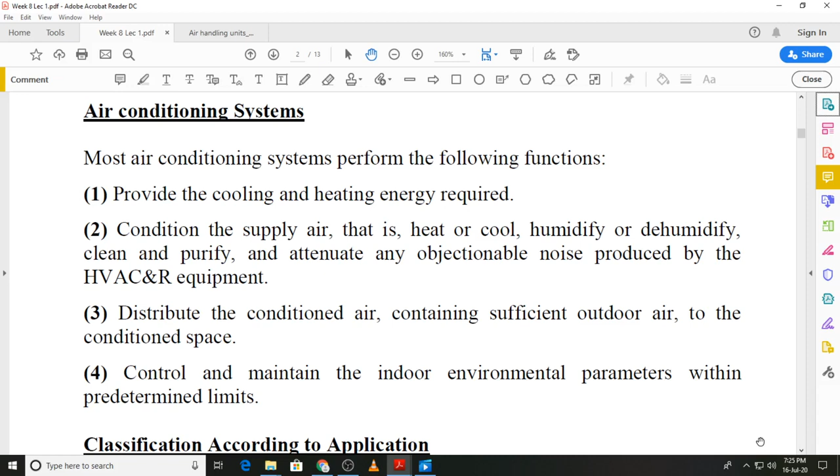The classification of an air conditioning system can be done on the basis of application, that is for human comfort, and that takes various forms. For example, if you are providing air conditioning to the occupants of an office building, a shopping center, or a restaurant, that's the commercial sector. You also provide the same air conditioning for educational institutes, libraries, etc., so you have the institutional sector.

After that we can also go to the residential sector, which includes hotels or apartment blocks that are air conditioned. Then we have hospitals, clinics, or other healthcare facilities. And finally, of course, the transport modes, which include air travel, travel on roads, and on sea. So we have a wide and diverse range of applications of air conditioning for human comfort.

Then we move on to the industrial application, that is process air conditioning, and there are several examples. I've just identified a few here. For example, in the textile industry, when we manufacture a particular textile or fabric, the fiber used for manufacturing has properties very much dependent on the humidity and temperature levels, and those are controlled using some sort of air conditioning system.

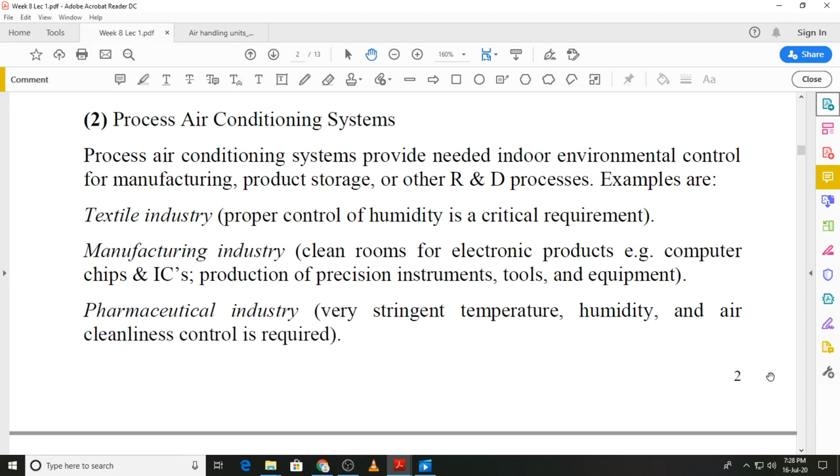We now move on to central air conditioning systems, and there are three broad categories, that is all air systems. When we talk about these three categories, we divide or distinguish between them according to the mode of energy transfer, that is how we are carrying energy from the conditioned space.

If it is done solely through the use of air within the conditioned space, that is known as an all air system. That all air system requires the use of air handling units or rooftop packages through which the air is conditioned. How these function, you will look at it later.

The difference between an air handling unit and a rooftop package is that primarily in a rooftop package the refrigeration system is also present over there, whereas in an air handling unit the refrigeration system is separate and it is located in the plant room of the system.

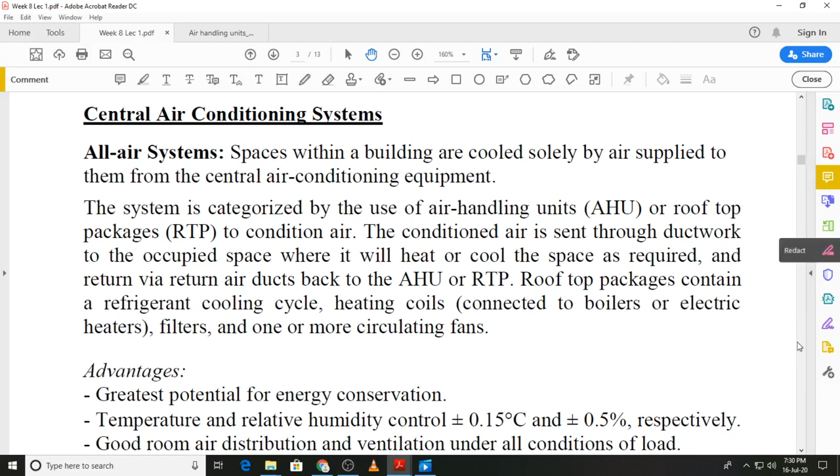Then we look at the various advantages and disadvantages of such a system, and for large buildings and complexes, this has the greatest potential for energy conservation, and we have very precise temperature and humidity control. Air distribution and ventilation under varying loads is carried out quite well with this, and the noise in the conditioned space is minimized because we have a plant which is located away from the conditioned spaces as required.

Of course, it has certain disadvantages, that they take up more space, and if you have to retrofit such a system, that means after several years you have to make changes that may not always be possible. And the balancing of air requires special attention in large buildings, but that is nowadays not much of a problem, because we do it through computerized control systems.

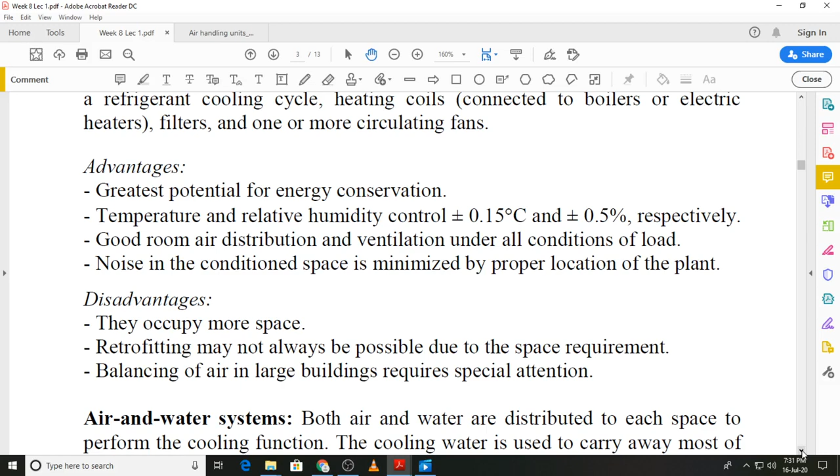Then we have the second type of air conditioning system, which is known as the air and water system, and this time we are using both air and water inside the conditioned space for the energy transfer. The water takes away the sensible energy.

If we are talking about cooling, it will be chilled water that is used in the conditioned space. If we want to provide heating, then it will be hot water, and the air will take up the role of ventilation, and it will also carry away the latent load, that is the moisture from the conditioned space.

And these are systems which work best for what is known as perimeter applications. That means in the exterior spaces of buildings with large sensible loads, and where the control of humidity is not required very closely.

The advantage, of course, is that you can control individual zones by varying both the air and water flow rates or temperatures. Space requirement is somewhat reduced, and the cooling coil is in the conditioned space, but it is dry, so the problem of a condensate that will have to be drained away is not present, and that also eliminates any risks of bacterial growth.

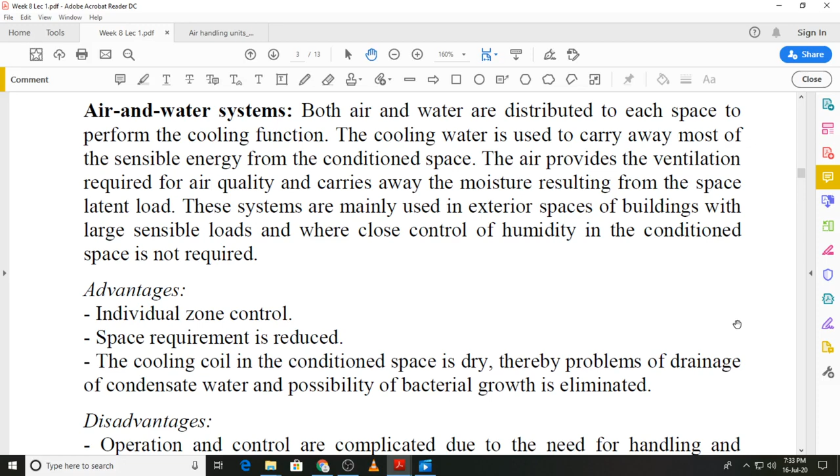The disadvantage is that operation control is quite difficult, in the sense that we need to control both the flow rate of water and air and their temperatures, and as mentioned earlier, the usage is suitable for perimeter zones where we have large sensible loads.

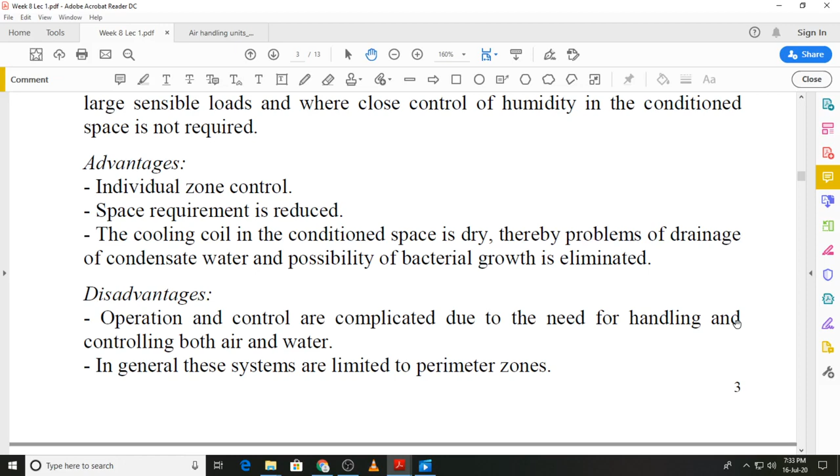Then we will move on to the third type, in which we will use only water for carrying the energy into or away from the conditioned space, and they again require units which are known as fan coil units, and they are located in each room of the building, and if cooling is required, chilled water will be circulated inside those FCUs.

And if it is heating that is required, you can circulate hot water through those coils, and that is how the all water system works. The air has no role in that sense, so if we require ventilation, the air will have to be supplied from outside through an opening in the wall.

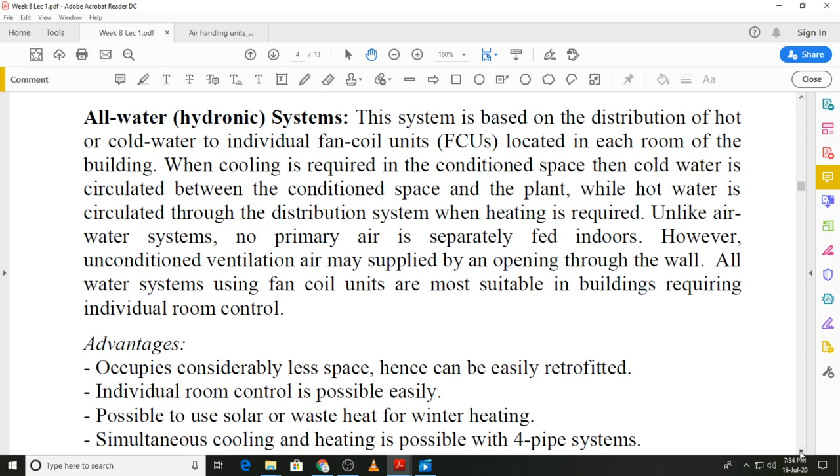And these would work where you will just require individual room control, and again they require less space and they can be easily retrofitted. Individual room control is possible, and because in winter the temperature of the water that is required is not too much, we can also make use of solar or waste heat for that purpose.

Simultaneous heating and cooling is possible with what is known as a 4-pipe system. That means there will be 2 coils, one which can carry hot water and the other which can carry cold water, whereas there is also another system which is known as a 2-pipe system, so at one time you can either provide chilled water or hot water.

The disadvantage is that maintenance costs are higher, and draining of the condensate can be an issue at times, which can lead to health risks, because bacterial growth can occur if the condensate water is not properly drained from the conditioned space. Ventilation can also be an issue since we are just relying on the outside air, especially in summer and humid climates, where it may not be suitable to use these sorts of systems.

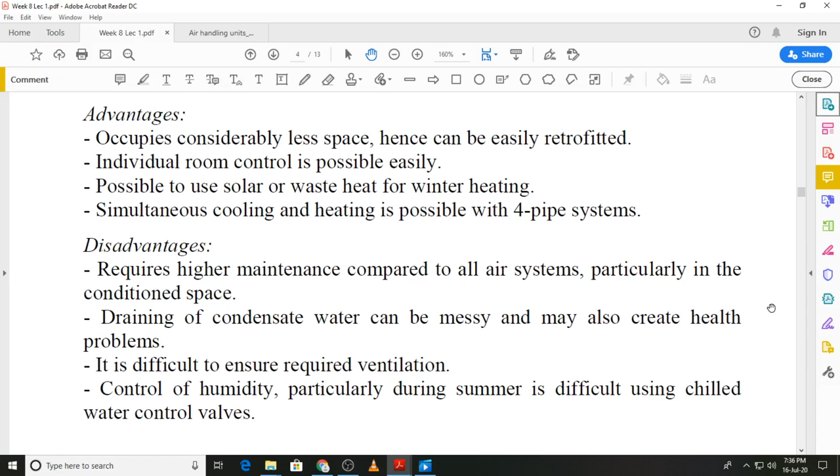The most widely used system is the all air system, and that is the type of system we are now going to look at in more detail - the all air central air conditioning system.

These are systems for large area buildings with many zones of conditioned space. A zone is not necessarily a single room - it can be a collection of several rooms that all have the same operating characteristics. Large area buildings can have several zones with their own operating characteristics, and for that we use a central air conditioning system of the all air type.

The all air system has subsystems, one of which is the air system. Remember, we are using air as the only medium used to condition the space.

The components of an air system include the air handling units, the ductwork for supplying and returning air from the conditioned space or spaces, and various terminals or VAV units. VAV stands for variable air volume - we will look at that later on.

When air is supplied to a room or space, we have to diffuse it so that the air movement in the conditioned space is done properly. We also need an exhaust system for maintaining desired indoor air quality - we exhaust part of the air returning from the conditioned space, then mix the recirculated air with fresh outside air.

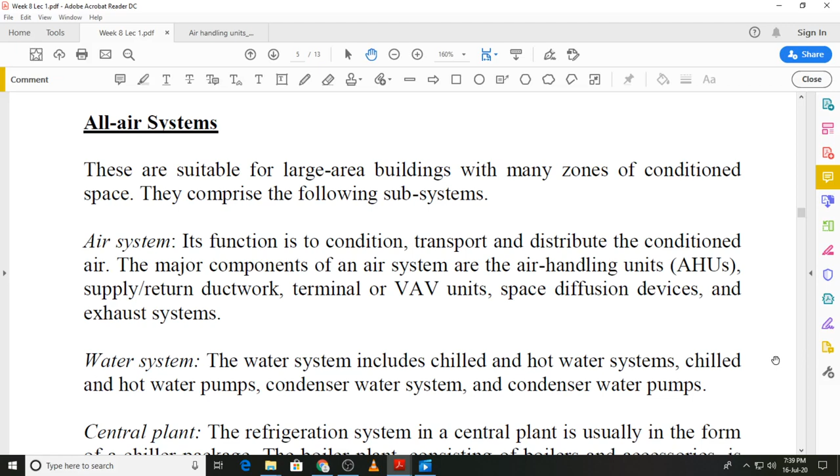As I said earlier, we have a central plant which is separately located, maybe in the basement of a building, or it could even be a separate facility away from the building. This is done to ensure that the noise of the equipment in the plant is not transmitted into the conditioned spaces.

We have access for personnel working in the plant for maintenance purposes, etc. The central plant will house the refrigeration plant, also known as a chiller package, which will ultimately provide you with chilled water. You will also have the boiler plant that provides hot water or maybe even steam for winter air conditioning.

We will have pumps for circulating the water, and also we might have a water cooled condenser for which there will also be a water circuit. Finally, since these are now large systems, they require control through a control system.

We have controls which are now microprocessor based, with various sensors for temperature, humidity measuring, and pressure gauges, all connected to a central control system. Outputs from these gauges and sensors allow the operation of various components of the system.

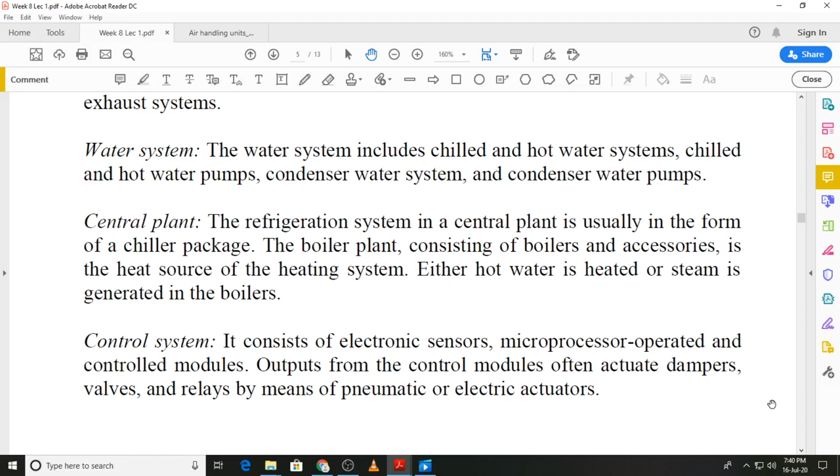What we can do is look at what is happening in the plant room, and then we will move on to the air handling unit.

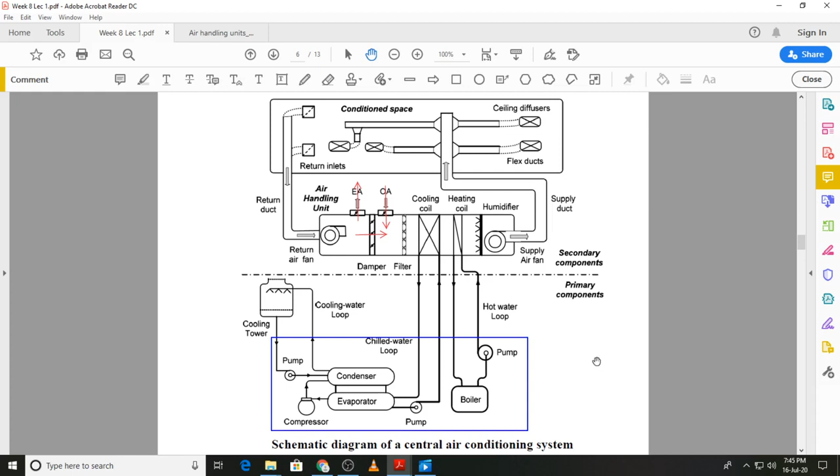We will now look at another view of the AHU, and you can see all those panels. It's like a large cabinet with access panels that allow you to service various parts of the AHU. So you have dampers, you will have blowers, you will have filters, and the heating cooling coils.

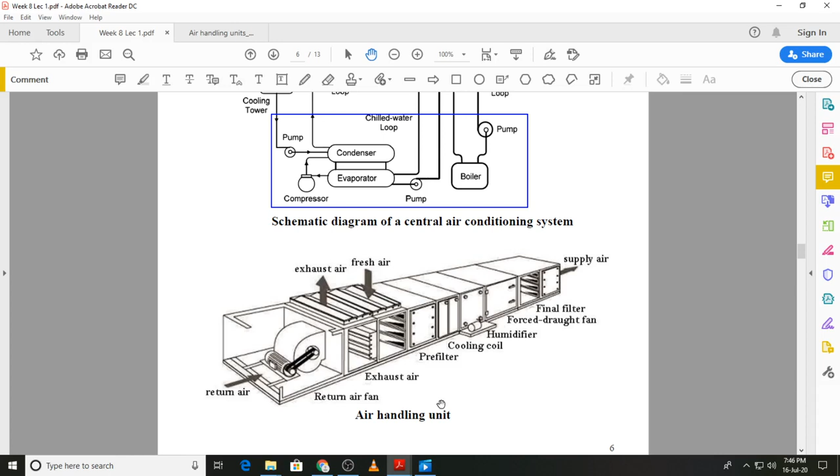So that is how an air handling unit would look like, and I will show you an actual photograph of an air handling unit, and then we will also look at a video showing the use of AHUs in a central air conditioning system. So I will just show you a photograph of an AHU.

There is going to be a set of filters over here. So if any dust particles from the conditioned space have gone into the air, they will be removed.

We will have a fan for the return air fan, and you will have the heating and cooling coils over here. So let's first look at the return air, then we will come to those coils when we talk about the supply side. The return air goes into what is known as the mixing box.

Here the recirculated air mixes with the fresh air from outside. As you can see, we are moving in this direction, and we have an exhaust damper over here. Part of the air which is returned from the conditioned space is exhausted, and the remaining air is over here, mixed with the fresh air.

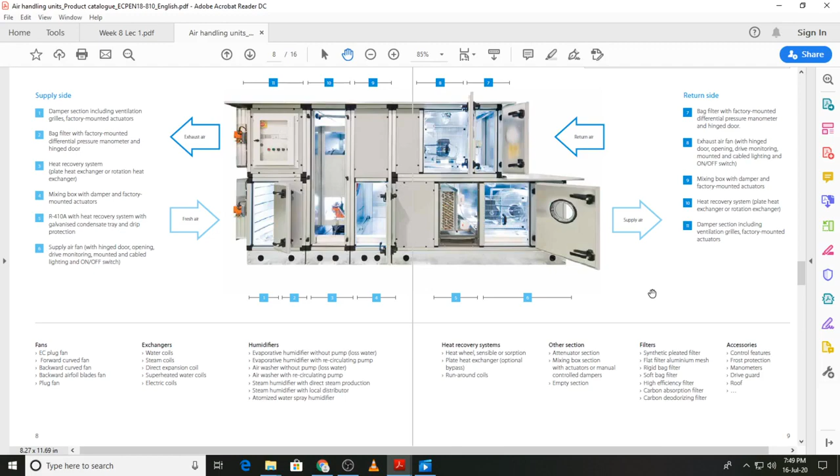We will now look at a video on the working of an air handling unit.

So where do we find air handling units? Air handling units, which usually have the acronym AHU, are found in medium to large commercial and industrial buildings. They are usually located in the basement, on the roof, or on the floors of a building, and many large buildings will likely have a mixture of all of these.

AHUs will serve a specified area or zone within a building, such as the east side or office areas from floors 1 to 10, or perhaps a single purpose such as just the building's toilets. Therefore, it's very common to find multiple AHUs around a building.

Some buildings, particularly old high-rise buildings, will have just one large AHU, usually located on the roof. These will supply the entire building. They might not have a return duct. Some older designs rely on the air simply leaking out of the building, but this design is not so common anymore in new buildings because it's very inefficient.

Now it's most common to have multiple smaller AHUs supplying different zones to give better control and higher quality space conditioning. Buildings are now also much more airtight, so we need to have a return duct to regulate the pressure inside the building. So what is the purpose of an air handling unit?

Air handling units condition and distribute air within a building. They take fresh ambient air from outside, clean it, heat it or cool it, maybe humidify or dehumidify it, and then force it through ductwork around to the designated areas within the building.

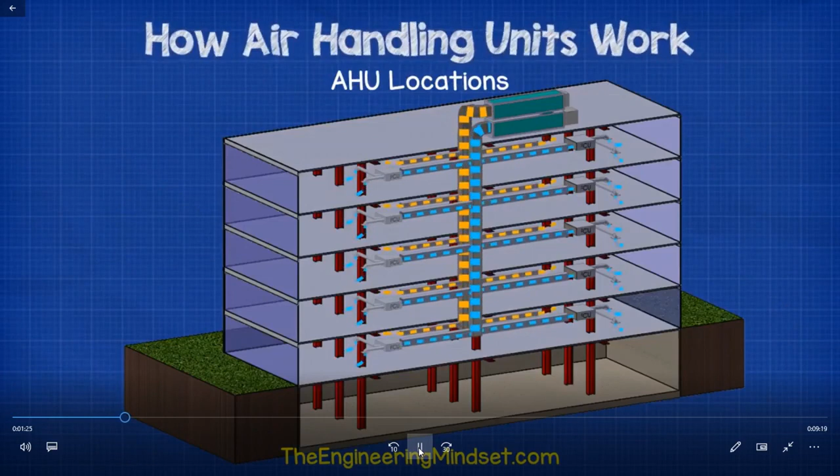Most units will have an additional duct run to pull this dirty used air out from the rooms back to the AHU, where a fan will discharge this back into the atmosphere. Some of this return air might be recirculated back into the fresh air supply to save energy.

We'll have a look at that later in this video. Otherwise, where that isn't possible, thermal energy can be extracted and fed into the fresh air supply intake to also save energy. Again, we'll look at that in much more detail later in this video.

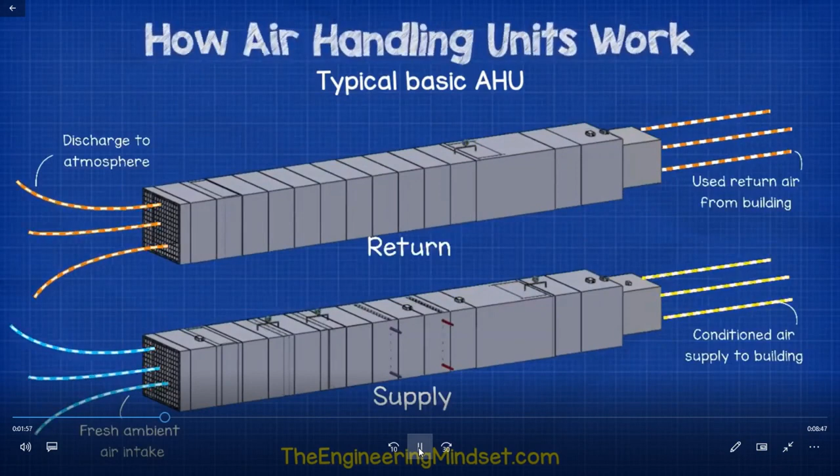Let's have a look at a simple, typical AHU design, and then we'll look at some more advanced ones. In this very basic model, we have two AHU housings for flow and return air. At the very front, on the inlet and outlet of each housing, we have a grille to prevent objects and wildlife from entering into the mechanical components inside the AHU.

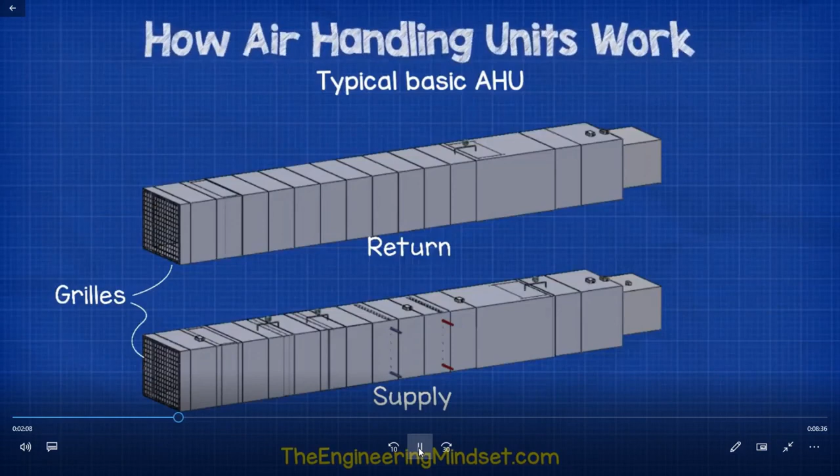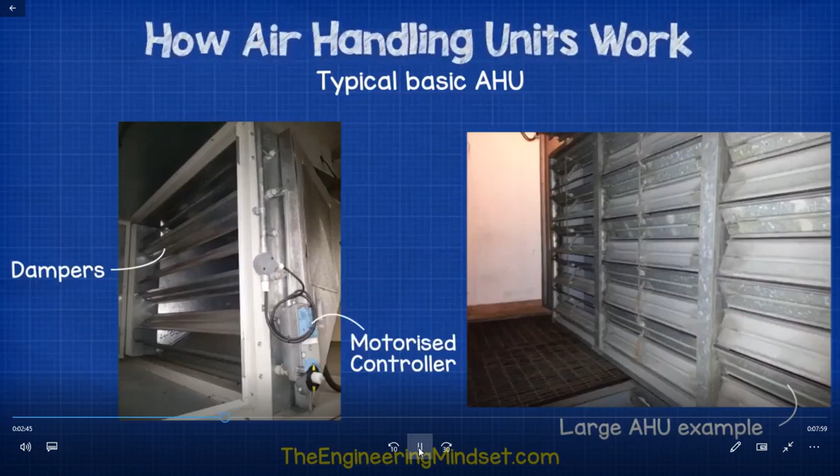At the inlet of the fresh air housing and the discharge of the return air housing, we have some dampers. The dampers are multiple sheets of metal which can rotate. They can close to prevent air from entering or exiting the AHU, open fully to fully allow air in or out, and also vary their position somewhere in between to restrict the amount of air which can enter or exit. I'll also show you some examples of real-world dampers in AHUs. The one on the left has the motorized controller visible, which changes the position of the dampers.

After the dampers, we'll have some filters. These are there to try and catch all the dirt and the dust, etc. from entering the AHU and also the building. If we don't have these filters, the dust is going to build up inside the ductwork and within the mechanical equipment. It's also going to enter the building and be breathed in by the occupants, as well as make the building dirty. So we want to remove as much of this as possible.

Across each of the filter banks we'll have a pressure sensor. This will measure how dirty the filters are and warn the engineers when it's time to replace them. As the filters pick up dirt, the amount of air that can flow through them is restricted, and this causes a pressure drop. Typically, we'll have some panel filters or pre-filters to catch the largest dust particles, then some bag filters to catch the smaller dust particles.

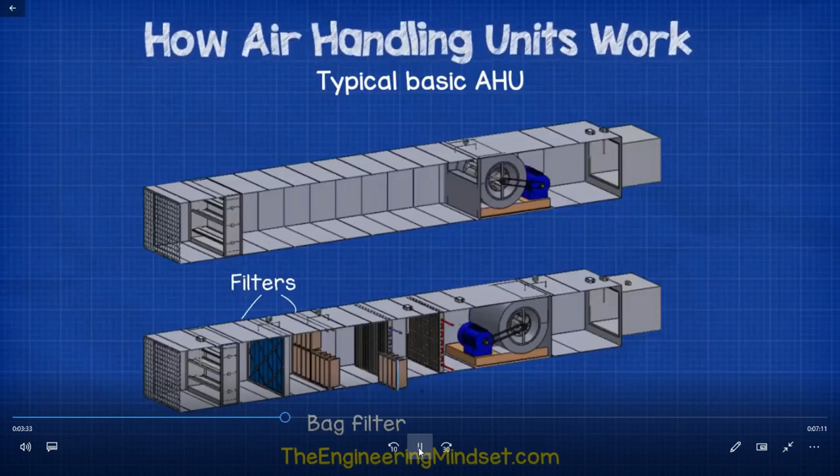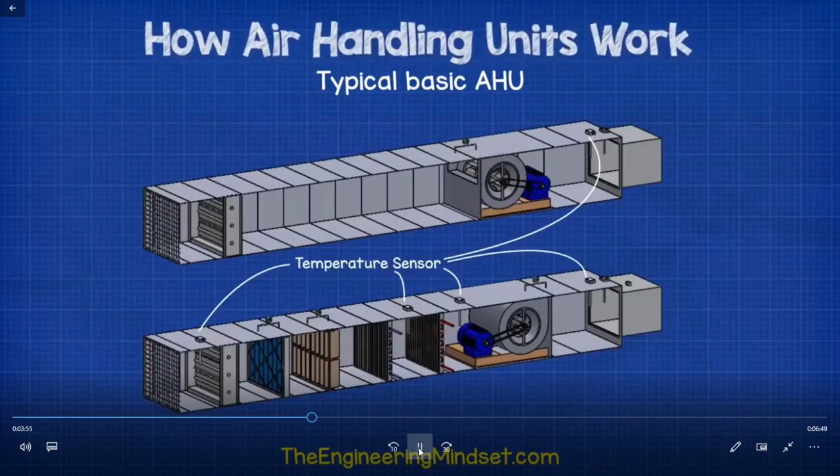The next thing we'll find are the cooling and heating coils. These are there to cool or heat the air. The air temperature of the supply air is measured as it leaves the AHU. This needs to be at a design temperature to keep the people inside the building comfortable. This design temperature is called the set point. If the air temperature is below this value, the heating coil will add heat to increase the air temperature and bring it up to set point. If the air is too hot, then the cooling coil will remove heat to lower the air temperature and also reach the set point. The coils are heat exchangers.

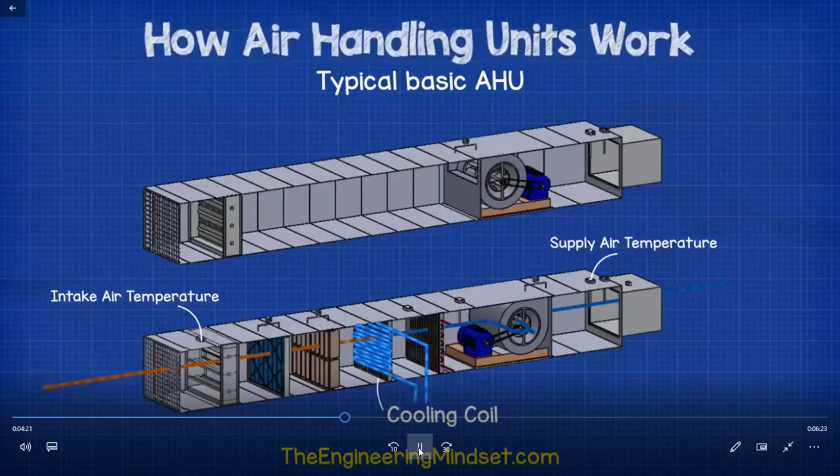Inside the coil is a hot or cold fluid, usually something like heated or chilled water, refrigerant, or perhaps steam. Now, we've discussed these in great detail previously in other videos.

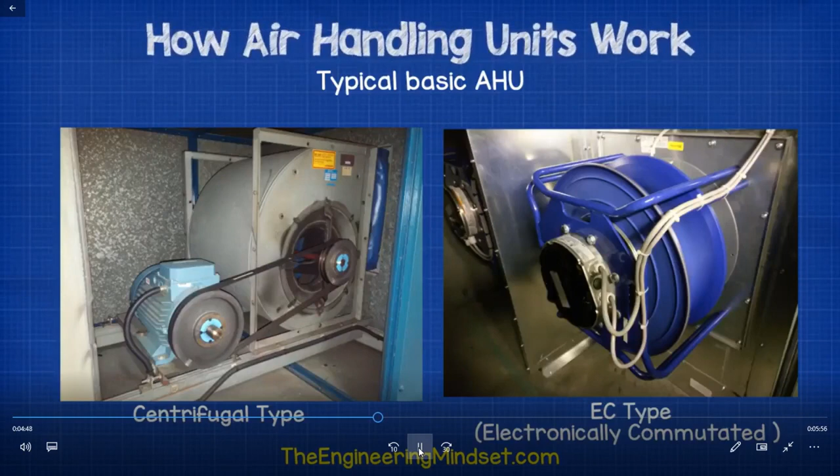Next, we'll have a fan. This is going to pull air in from outside and then through the dampers, the filters, the coils, and then push this out through the ductwork and around the building. Centrifugal fans are very common in old and existing AHUs, but EC fans are now being installed and also retrofitted for increased energy efficiency.

Across the fan we'll also have a pressure sensor. This will sense if the fan is running. If it is running, then it will create a pressure difference. We can use this to detect a failure in the equipment and warn the engineers of a problem. We'll also likely have a duct pressure sensor shortly after the fan. This will read the static pressure, and in some AHUs the speed of the fan is controlled as a result of the pressure in the duct.

So we'll also very often find a variable speed drive connected to the fan for variable volume systems.

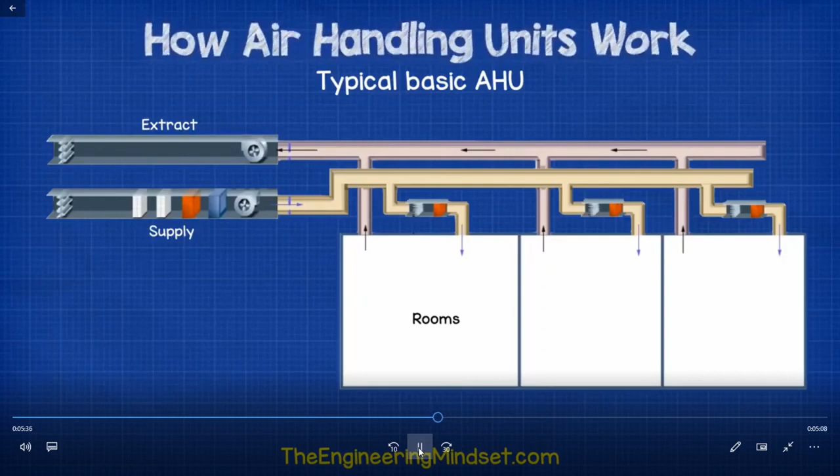Then we have the ductwork, which sends the air around the building to the designated areas. We'll also have some ductwork coming back, which is bringing all the used air from the building back to a separate part of the AHU. This return AHU is usually located near the supply, but it doesn't have to be, it can be located elsewhere in the building. The return AHU in its simplest form has just a fan and a damper inside.

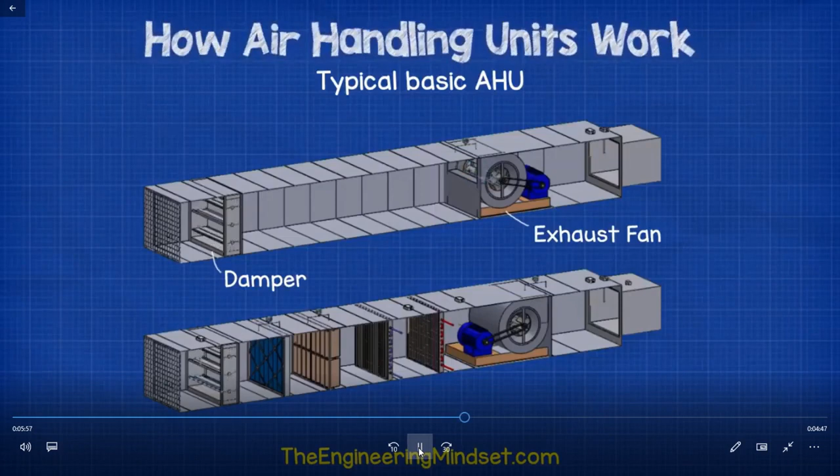The fan is pulling air in from around the building and then pushing it all the way out of the building into the atmosphere. The damper is located at the exit of the AHU housing and will close when the AHU turns off. That's a very simple and typical AHU, so what else might we find?

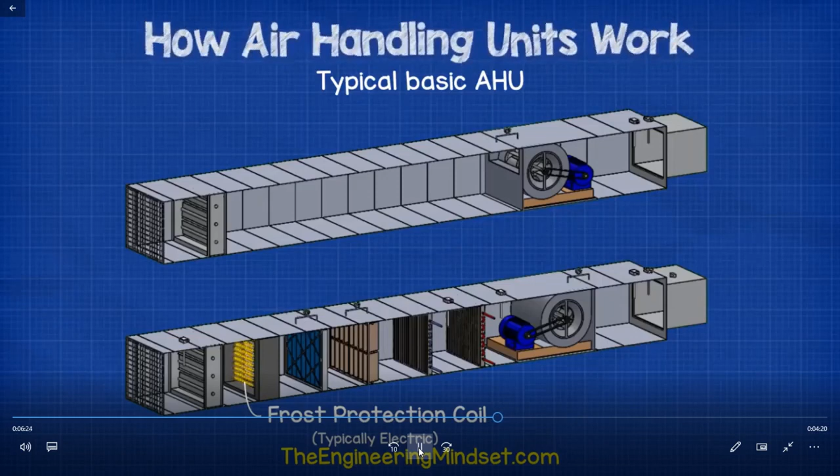If you're in a cold part of the world where air temperatures reach freezing point or close to it, we'll find a preheater in the inlet of the fresh air intake. This is usually an electrical heater. When the outside air gets to around 6 degrees Celsius or 42.8 degrees Fahrenheit, the heater will turn on and heat up the air to protect the components inside from frost. Otherwise, this could freeze the heating and cooling coils inside and burst them.

What about humidity control? Some buildings need to control the humidity of the air they supply into the building. We'll find a humidity sensor at the outlet of the supply AHU to measure the moisture in the air supply. This will also have a set point for how much moisture should be in the air by design. If the air's moisture content is below this value, then we need to introduce moisture into the air using a humidifier. This is usually one of the last things in the AHU. This device will usually either add steam or spray a water mist into the air.

Many standard office type buildings in Northern Europe and Northern America have turned off their humidity units or uninstalled them to save energy, although they are still crucial for places like document stores and computer rooms.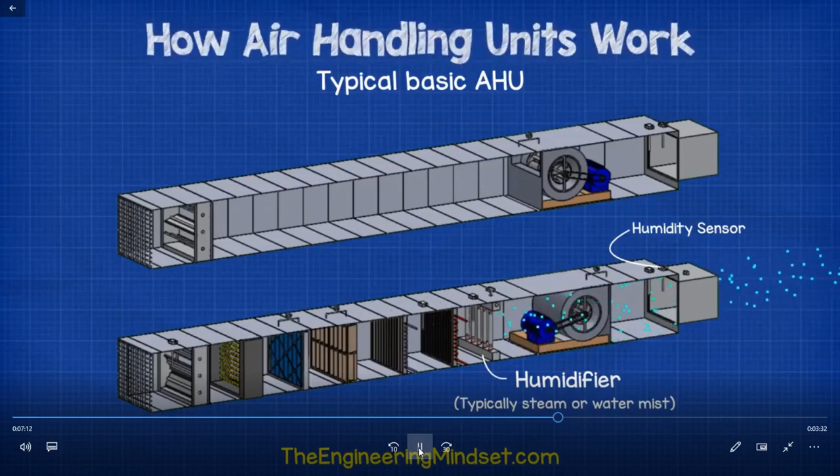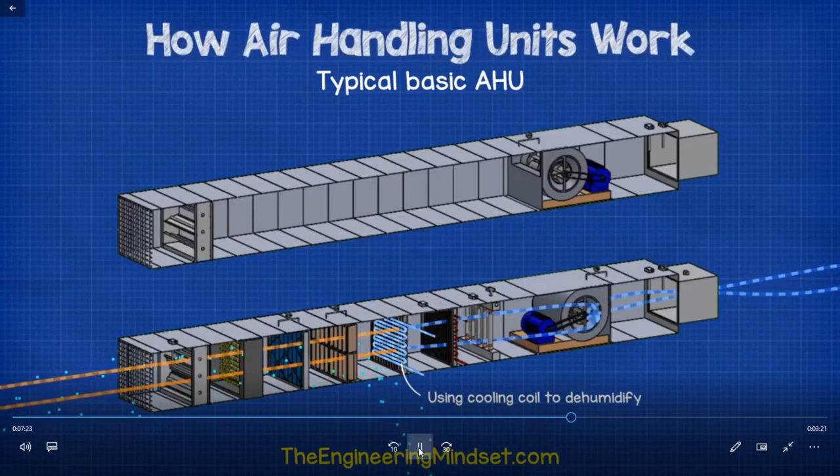If the air is too humid, then this can be reduced through the cooling coil. As the air hits the cooling coil, the cold surface will cause the moisture within the air to condense and flow away. You'll find a drain pan under the cooling coil to catch the water and drain this away. The cooling coil can be used to further reduce the moisture content by removing more heat, but of course this will decrease the air temperature below the supply set point. If this occurs, then the heating coil can be turned on to bring the temperature back up. This will work, although it is very energy intensive.

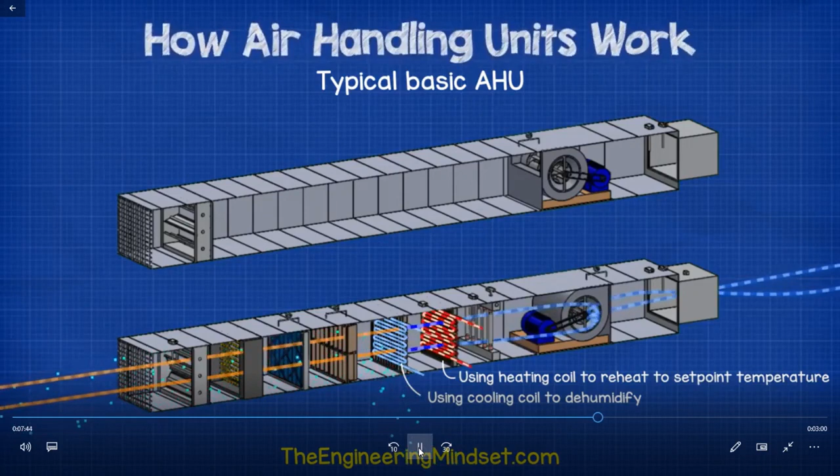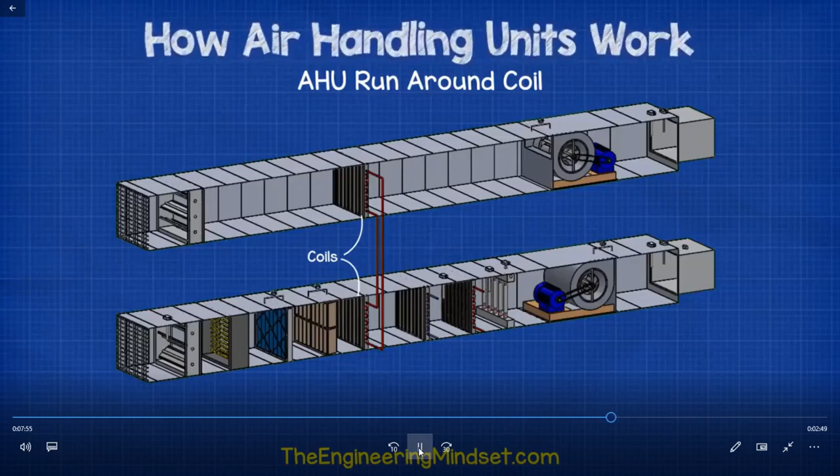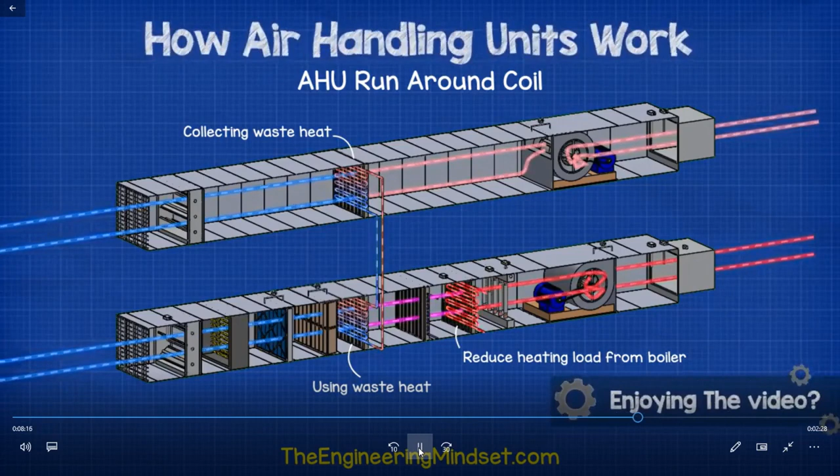Energy recovery. If the supply and extract AHUs are located in different areas, then a common way to recover some of the thermal energy is to use a runaround coil. This uses a coil in both AHUs and a pump circulates water between the two. This will pick up waste heat from the extract AHU and add this to the supply AHU. This will reduce the heating demand on the heating coil when the outside air temperature is below the supply set point temperature and the return air temperature is higher than the set point. The heat would otherwise be wasted as it is simply rejected to atmosphere. As the pump will consume electricity, it is only cost effective to turn on if the energy saved is more than the pump will consume.

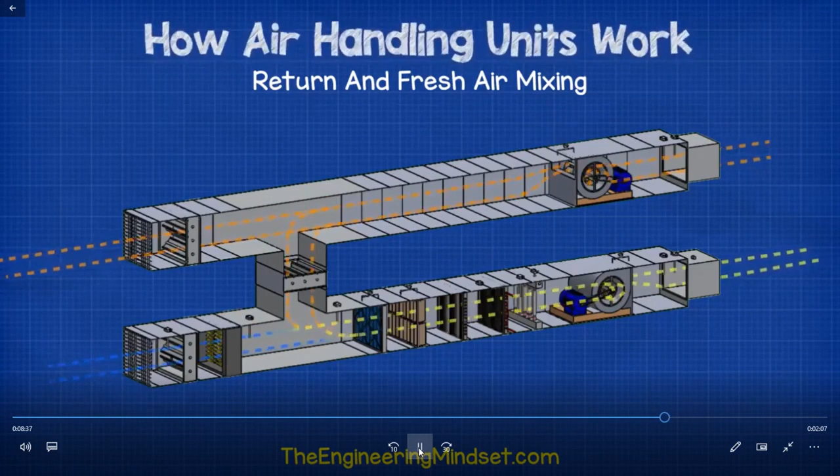Another very common version we'll come across is to have a duct sit between the exhaust and the fresh air intake. This allows some of the exhaust air to be recirculated back into the fresh air intake to offset the heating and cooling demand. An additional damper sits within the connecting duct to control how much air can be recirculated. This is safe and healthy to do, but you will need to ensure that the exhaust air has a low CO2 count, so we need some CO2 sensors to monitor that. If the CO2 level is too high, then the air can't be reused. The mixing damper will close and all the return air will be rejected from the building. When in recirculation mode, the main inlet and outlet dampers will not fully close in this setup because we will still need a minimum amount of fresh air to enter the building.

We can use this in the winter if the return air is warmer than the outside air, and we can also use this in the summer if the return air is cooler than the outside air, respective to the supply set point temperature. We'll also need some temperature sensors at the intake, return, and just after the mixing region. Some buildings require 100% fresh air, so this strategy can't be used everywhere. The local laws and regulations will dictate this.

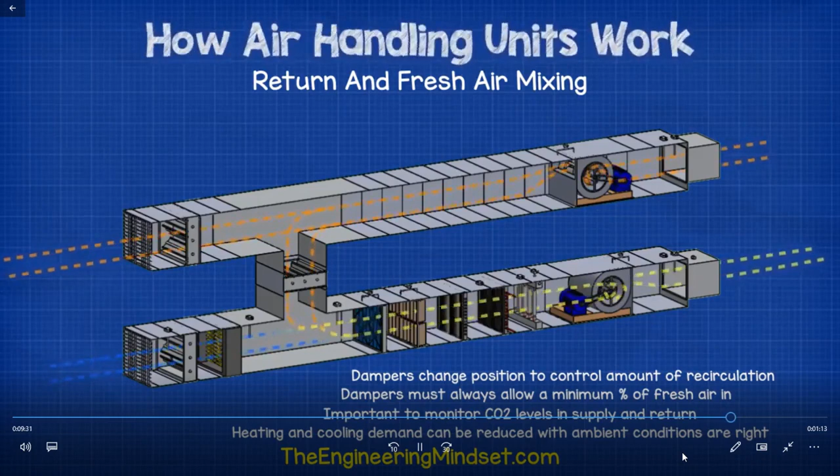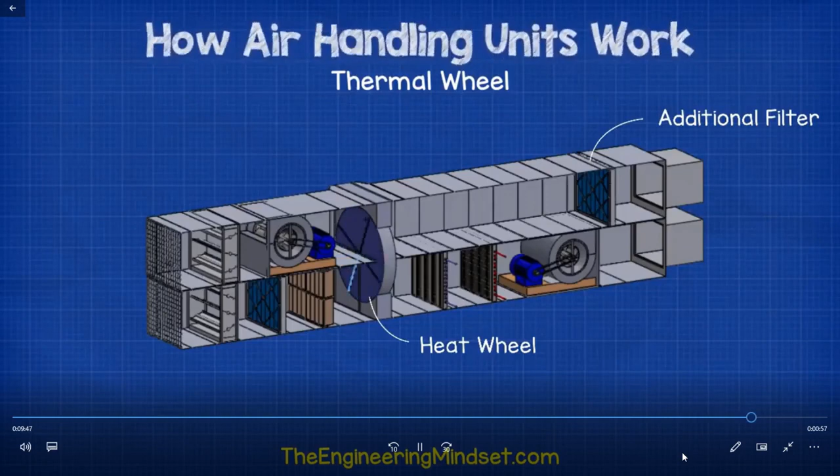Another variation we might come across is the heat wheel. This is very common in newer compact AHUs. This uses a large rotating wheel. Half of it sits within the exhaust airstream and half of it sits within the fresh air intake. The wheel will rotate, driven by a small induction motor. As it rotates, it picks up unwanted heat from the exhaust stream and absorbs this into the wheel's material. The wheel then rotates into the fresh air intake stream.

This air is at a lower temperature than the exhaust stream, so heat will transfer from the wheel into the fresh air stream, which heats the incoming air and reduces the demand on the heating coil. This is very effective, but some air will leak from the exhaust into the fresh air stream, so it cannot be used in all buildings.

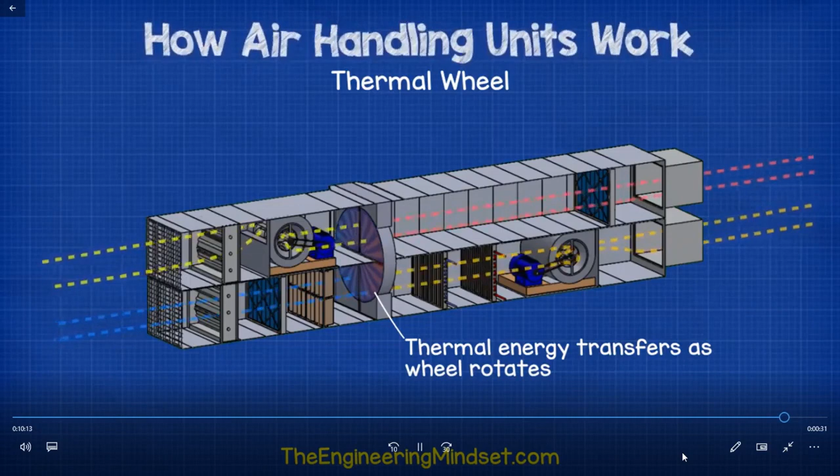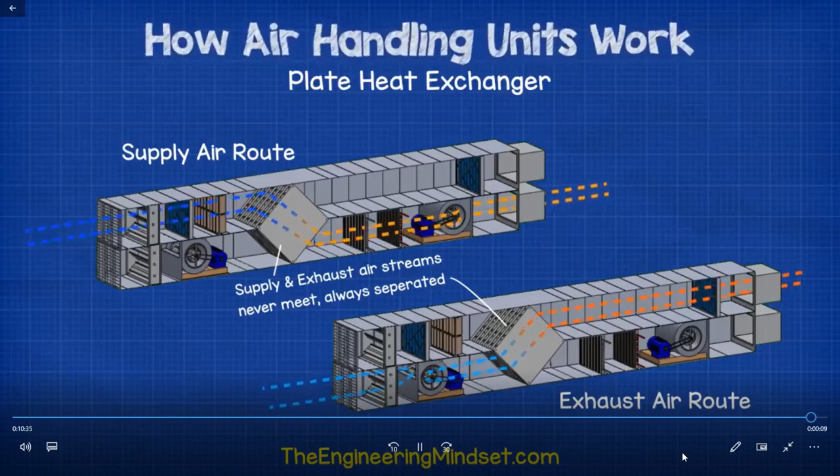Another version we might come across is the air plate heat exchanger. This uses thin sheets of metal to separate the two streams of air so they do not come into direct contact or mix at all. The temperature difference between the two air streams causes heat to transfer from the hot exhaust stream through the metal walls of the heat exchanger into the cold intake stream. The two air streams need to cross over for this to occur, so it can be a little confusing to look at. Just remember the air streams are not mixed.

We come back to the all-air central air conditioning system, and then we will look at further variations of this type of system: the constant air volume, or constant volume, system, or the variable air volume system. The constant volume system means that the volume of conditioned air supplied to a conditioned space remains unchanged even if the load in the space changes. That means the variation in load will be countered by changing the temperature of the air, keeping the volume supplied to the conditioned space unchanged.

So the simplest of these is the single duct, constant volume, single zone system. It has one supply duct through which hot or cold air will flow according to our requirement. In winter we will be using the heating coil to provide hot air to the conditioned space. In summer we will be supplying cold air to the conditioned space.

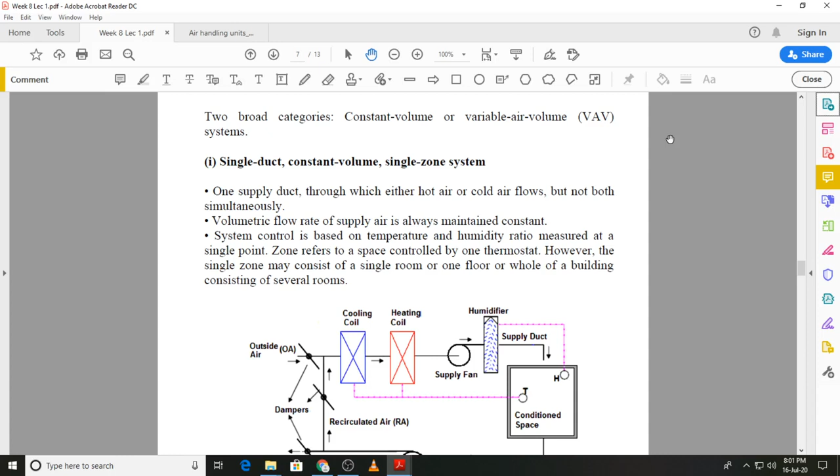The schematic diagram is shown here. You can see we have the cooling coil, the heating coil, and you might also have a humidifier shown in this schematic diagram. There is the supply duct and the return duct. Part of the return air is exhausted, the recirculated air is mixed with outside air, then it is passed through the cooling or heating coil as required. The cooling cycle on the psychrometric chart that we looked at earlier will apply to this particular arrangement.

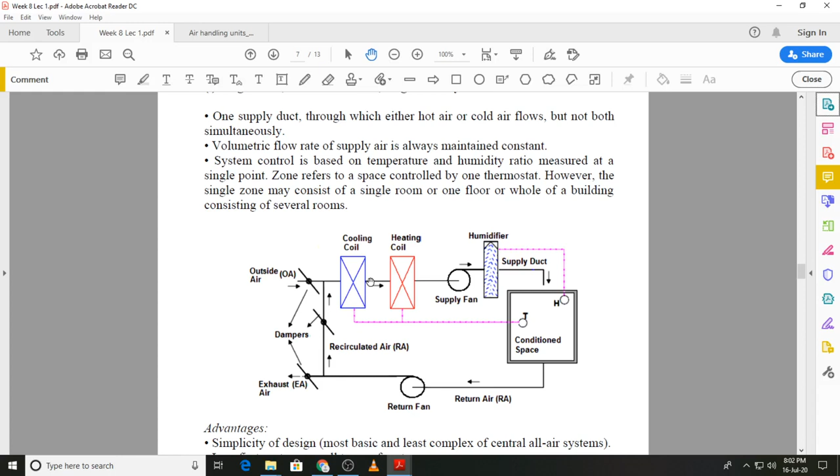It has certain advantages and disadvantages listed here, because it's the simplest of the designs. It has a low first cost and maintenance is easy, but the restriction is that it can condition only one zone. It is not suitable for multiple zones, and if there is a change in requirement from a single zone to a multiple zone system, this type of system, if installed, would not be easily modified. It would probably be better to shift to a proper multi-zone system, which we are going to look at as we move through this discussion.

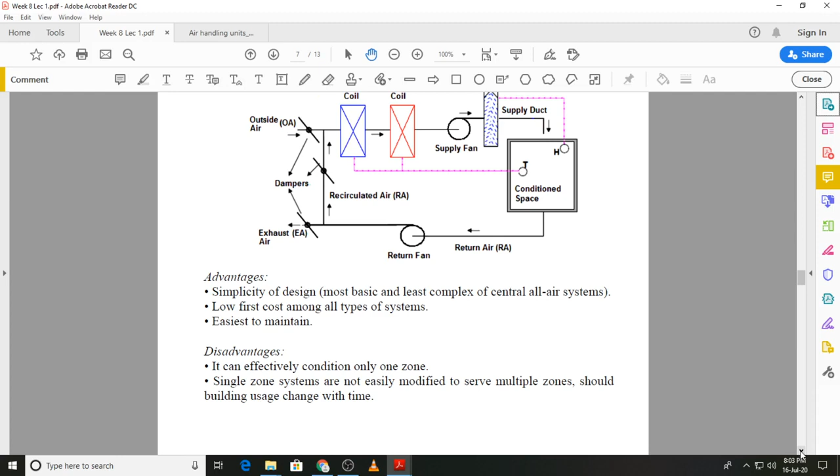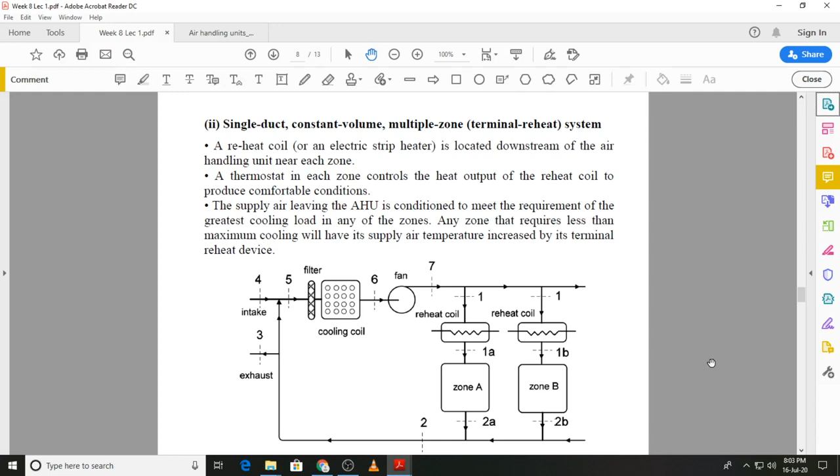Now let's look at the possibility where we still have a single duct and constant volume system, but this time it serves multiple zones. For simplicity, in the schematic diagram I have shown two zones. There can be more than two zones, and this type of arrangement is known as a terminal reheat system, in which we can see that before each zone there is what is known as a reheat coil. The purpose of the reheat coil is to provide energy to the air coming from the cooling coil according to the zone requirement.

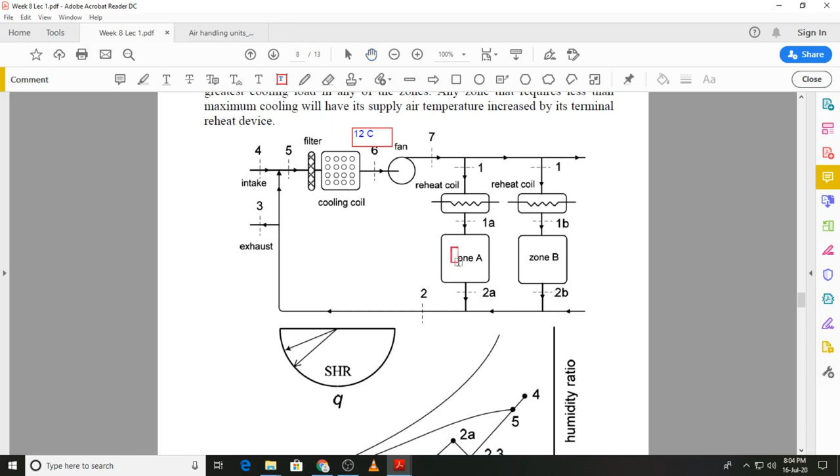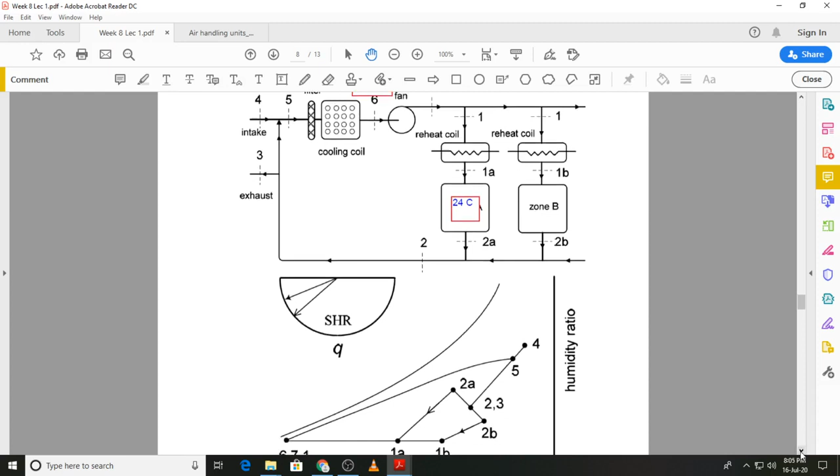Now let's say at state 6, after the cooling coil, we have air coming in at 12 degrees C, and we need to supply air to zone A, which we are keeping at 24 degrees C, whereas zone B is going to be maintained at a higher temperature, let's say 26 degrees C. You'll see the reason why I'm saying that. So the air we are supplying to zone A, let's say we need to supply it at a temperature of 18 degrees C — I'll mention that here — and the supply temperature to zone B, let's say that is higher, 20 degrees C.

So the supply of air at state 1A is at 18 degrees C, and the space is going to be maintained at 24 degrees C. The supply of air at state 1B to zone B is at 20 degrees C, and zone B is maintained at 26 degrees C. What we have done is cooled the air to 12 degrees C.

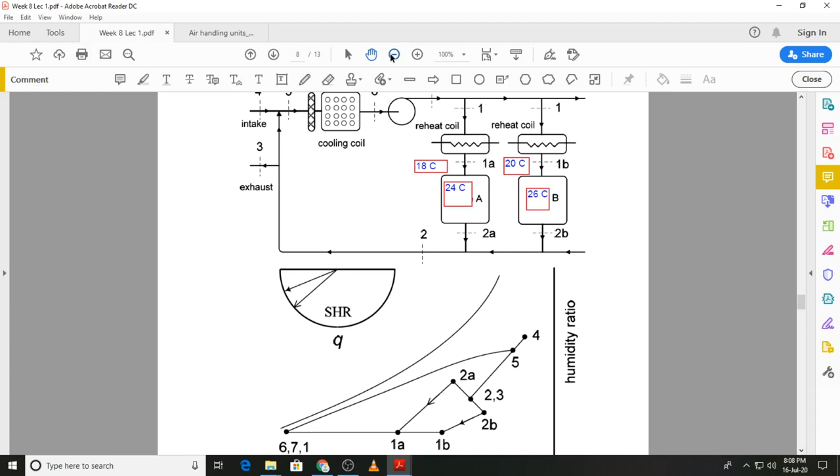The same is now shown on the psychrometric chart. I will just reduce it a little so we can look at it, the schematic as well as the psychrometric diagram, which shows the cooling cycle for a terminal reheat system with two zones.

You can see this state 6, 7, 1, they are all the same, so they are shown over here. That is after the cooling coil.

Then state 1A and state 1B are going to be different, and I've shown that the temperature at 1A was lower, 18 degrees C, and that's why I had said that the temperature at state 1B will be higher. So you can see the dry bulb temperature at 1A is lower than the dry bulb temperature at 1B, and because the reheat coil only sensibly heats the air, the process is shown over here.

There is sensible heating from state 6 to state 1A, and there is sensible heating from state 6 to state 1B for each of the two zones.

Then from state 1A the air goes into zone A, and from here it goes into zone B. So these two lines over here, this line for example is the space condition line or the load ratio line for zone A. Similarly, this line over here is the space condition line for zone B.

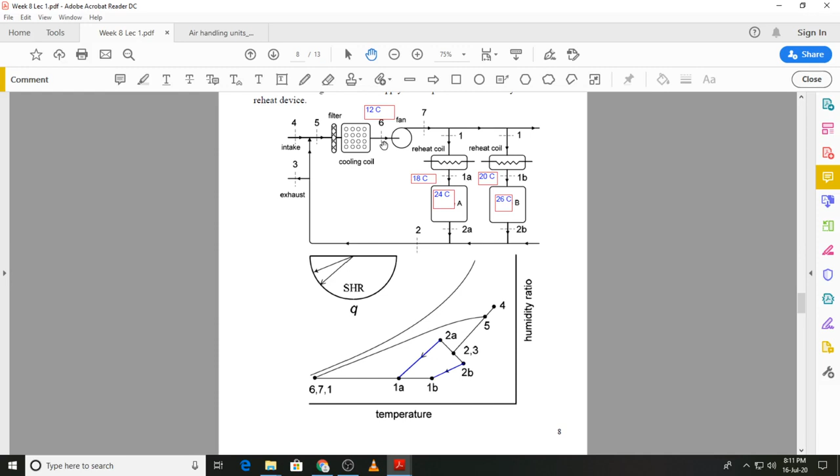Then the advantages and disadvantages of this type of system, the terminal reheat system, are given to you. It requires relatively small space, and temperature and humidity control is very good. It is flexible, and reheat can be added or removed according to the changes in zoning.

But the prime disadvantage is the energy cost. It is expensive to operate, so it's energy inefficient. For this reason, especially these days when there is great emphasis on energy conservation, the use of these systems is quite strictly regulated by most energy codes and standards across the globe.

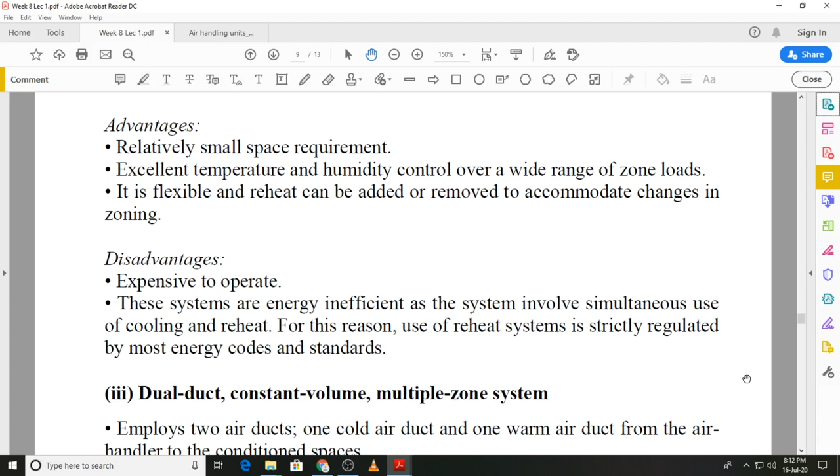We will now move on to the second type of multiple zone system with constant air volume, known as the dual duct constant volume multiple zone system. The name dual duct comes from the fact that instead of a single duct supplying air to the conditioned zone, we have two ducts: one carries cold air and the other warm air from the air handling unit to the conditioned space.

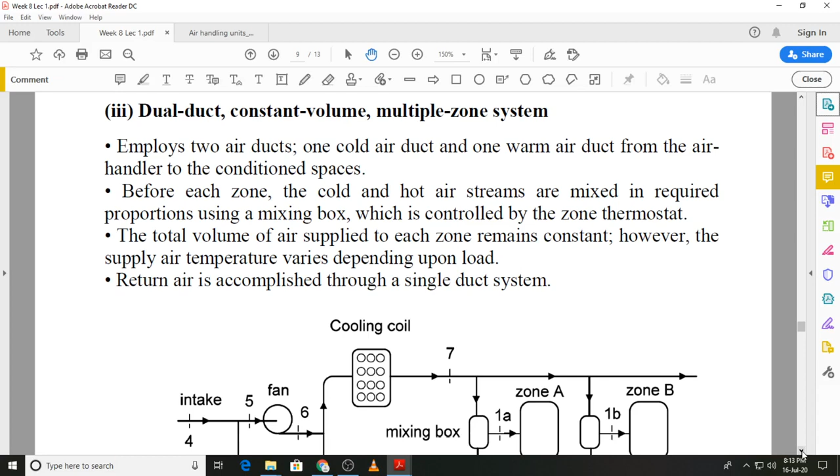Once we look at the schematic diagram you will understand how this works. Because we have two ducts, one will have cold air, so there's a cooling coil for that. The other will have a heating coil for generating warm air, and it might also have a humidifier. If the humidifier is not there, we can still have a heater, and that will still be a dual duct system.

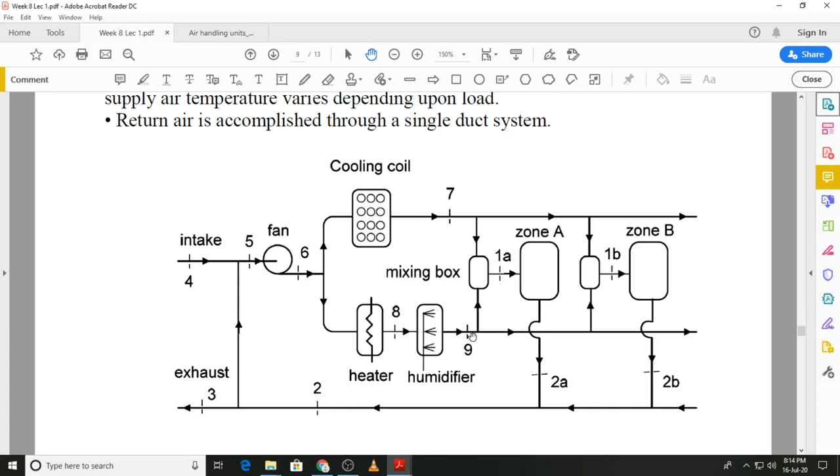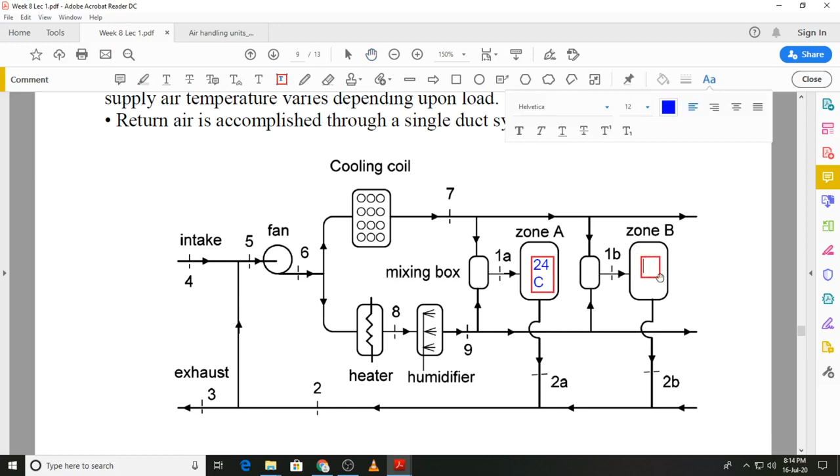At state 6, the air is divided into two streams: one goes to the cooling coil, the other to the heating coil, and we have the two zones shown. Let's put in some numbers: say the temperature is so much over here, and I want a different temperature over here. Looking at the diagram for zone 1B, 1A, 2A and 2B, 2B is higher, so we will say this is 26 degrees C.

We can leave it like this. We will be supplying air to zone A at a lower temperature and to zone B at a higher temperature. If this is 17 degrees C, we will supply air to zone B at a higher temperature, 21 degrees C.

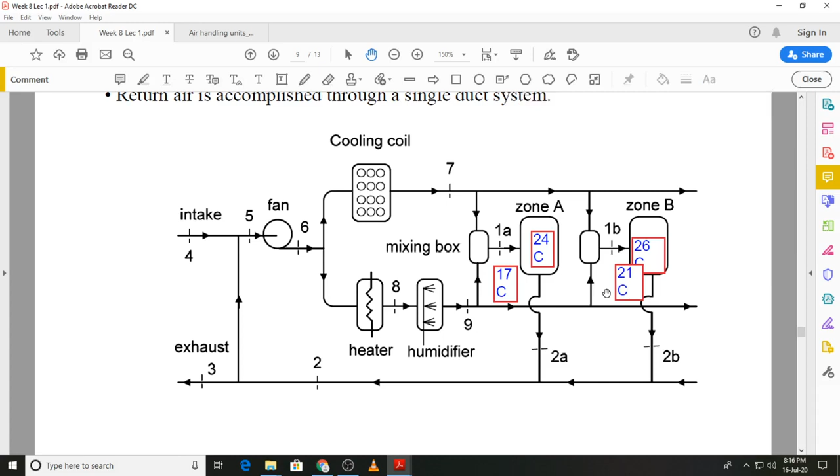For the air coming from the cooling coil, let's give some numbers: we have 14 degrees C here, and the air that is heated and humidified has a higher temperature, 40 degrees C. What we want to do is provide air to zone A at 17 and zone B at 21 degrees C respectively.

We will mix the air supplied from the cooling coil with the air coming from the heating coil in a mixing box, and by changing the proportion of air in this mixing box we can control the supply temperature to a particular zone. The same applies to zone B.

For example, if the load in zone A increases, the temperature will start to increase, and we will have to reduce the supply temperature to zone A. This can be done by reducing the amount of warm air and increasing the amount of cold air, such that the volume flow rate into the zone does not change, but the proportions of cold and hot air can be varied. This way we can vary the temperature of the supply air to the zone according to the zone load requirements, and the same applies to zone B.

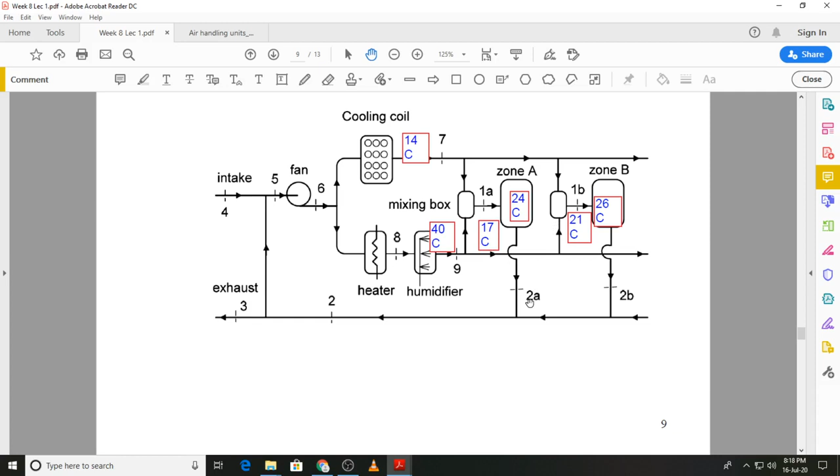I will show you the schematic diagram and the cooling cycle on the psychrometric chart. We start with the cooling coil position, state 7, and look at coil position 9, which is for the heating coil. In the mixing box the two streams are adiabatically mixed, so the resultant state will lie on a straight line connecting states 7 and 9.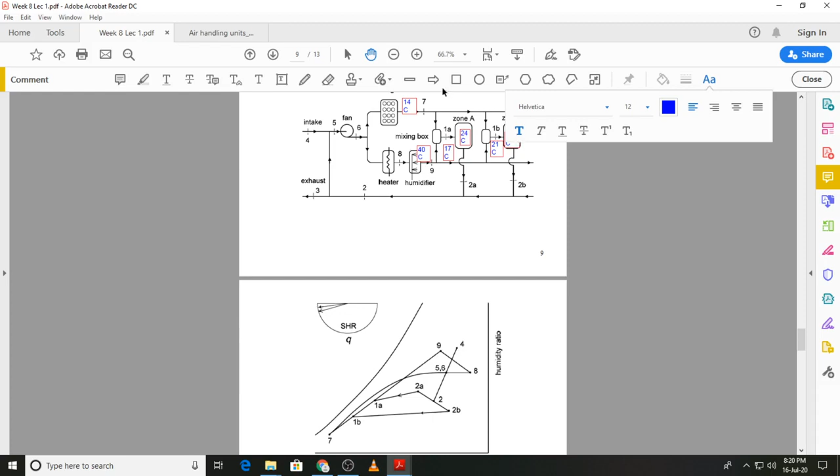Let me change this value so that it is in line with the psychrometric diagram, and this will then be, let's say, call it 15 degrees C, or let's say 16 degrees C.

Now if you look at these two values, they are consistent with the diagram drawn here. Temperature 1A is higher than temperature 1B, though it could be the other way around.

So you can have state 1B at a higher temperature and state 1A at a lower temperature, depending on the zone conditions. Then again you have the load ratio lines 1B to 2B, and 1A to 2A, which is the space condition line for the two zones. Then the return air from both zones is mixed to give us the resultant state 2, which we can see here.

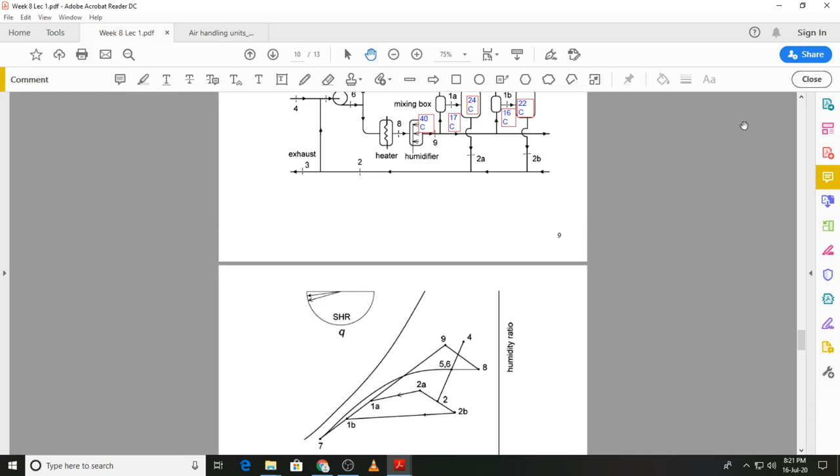That resultant state 2 is mixed with the outside air to give us state 5. So 2 and 4 gives us state 5, and state 6 is the same, after passing through the fan.

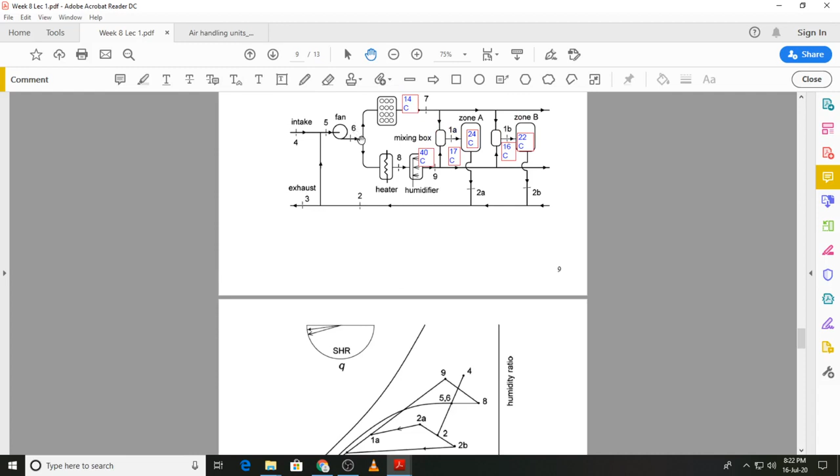Now we have the division of the air into two streams. One is cooled and dehumidified, the other is heated and humidified, shown by the respective processes. This is first sensible heating from state 6 to state 8 when it passes over the heating coil. Then it is humidified to state 9, and the other stream is cooled and dehumidified to state 7. Then these two streams mix in the mixing box, which is where we started from.

So that is the cooling cycle for a dual duct constant air volume multiple zone system. We will look at the advantages and disadvantages and move on to another arrangement for conditioning the multiple zones.

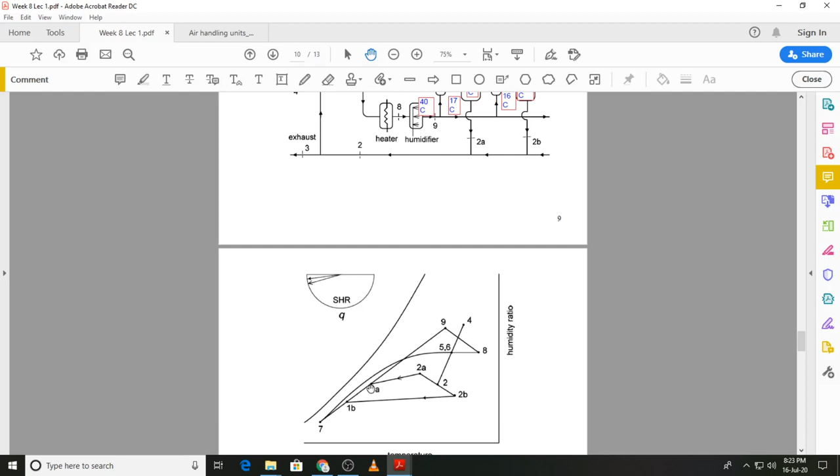This type of arrangement has the advantage that it can provide simultaneous heating and cooling in different zones. So if you need heating in one zone and cooling in another zone at the same time, because we can vary the proportion of the air in the mixing box, we can do that. Again, it responds very well to variations in zone load and maintains precise conditions in the conditioned space. Indoor air quality is also maintained properly, and no seasonal changeover is necessary—if you want to shift from winter to summer air conditioning, the same system can be seamlessly used for that.

Disadvantages: because there are two ducts, we need more space, and each duct has to be sized to handle the entire flow rate if required. For example, if only cold air is required, that duct, the cold air duct, should be able to handle the maximum flow rate, and similarly the hot air duct. It also has a high initial cost, and energy usage is a problem because we are heating and cooling the air at the same time. It's not very energy efficient.

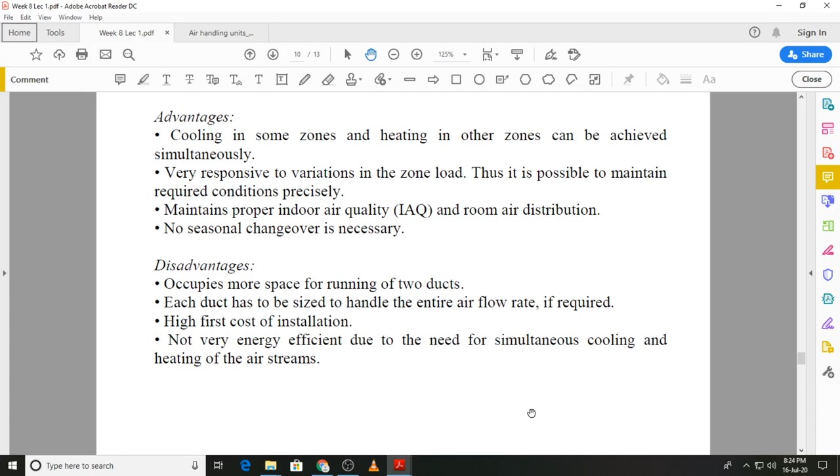We now move on to the other arrangement used in modern air conditioning systems, known as the variable air volume system, suitable for multiple zones. In a variable air volume system, as the name implies, the quantity of air supplied to the zone can be varied, whereas the temperature is kept constant. Previously we were keeping the quantity of air constant and varying the temperature—it's the other way around in the case of a VAV system.

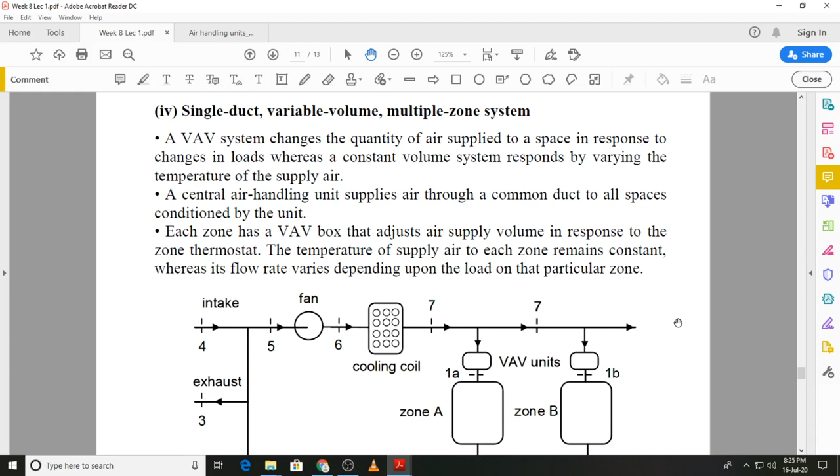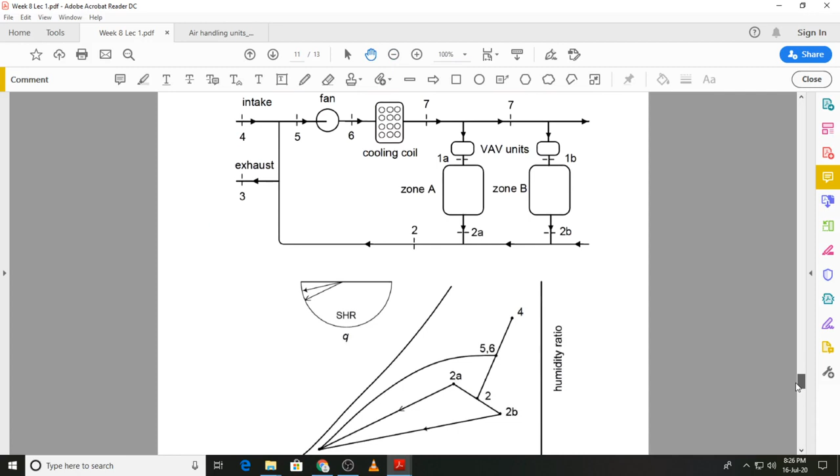To ensure that the volume flow rate to the zone can be varied, we need a unit known as a VAV unit, or variable air volume unit, or VAV box, which will allow us to vary the volume flow rate to the zone. Again we have the schematic diagram here, and at the same time I will try to show you the cooling cycle drawn on the psychrometric diagram. You can see after the cooling coil we have state 7, and the air at state 7 goes into both the zones.

So we have air going into both the zones at the same state. It's only the volume flow rate that is different, but because the zone loads are different, sensible and latent loads can be different, the space condition lines for the two zones will have different slopes, as you can see from state 1, from 1A to 2A for zone A, and 1B to 2B.

Then the return air is combined from the two zones to give us state 2. Part of that return air is exhausted, and then it is mixed with the outside air, which is at state 4, to give us state 5, and state 6 is the same after passing through the fan. Then it passes over the coil, where it is cooled and dehumidified. So it's similar to the cycle for the basic cooling cycle we looked at before, but the difference this time is that we are handling two zones, and this portion shows that difference.

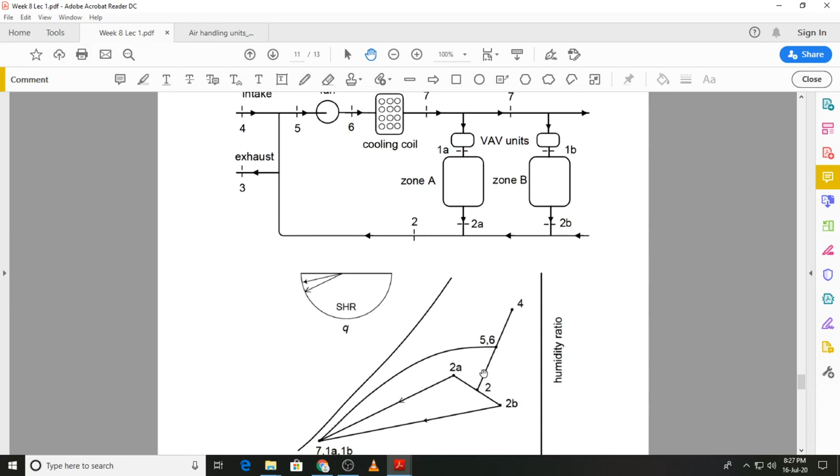We can move on to the advantages and disadvantages of this type of system. The principal advantage is its lower energy consumption even during partial load conditions, which also leads to lower fan power consumption. So there are system savings when we use a variable air volume system, and that is why modern air conditioning plants extensively use this sort of system. Temperature controls in both the interior and external zones can be carried out very well, and we can also shift the air flows from one zone to another according to changes in requirements.

Disadvantages: we have a high initial cost, but because it's very energy efficient, that initial cost pays back in a short duration. Because we are reducing the air flow rate in the conditioned space if the load changes, it might also cause deterioration of indoor air quality at very low loads, since the airflow rates have to be reduced. That means the proportion of outside or fresh air will reduce, and the air quality inside might not be maintained. That's a consideration we have to keep in mind.

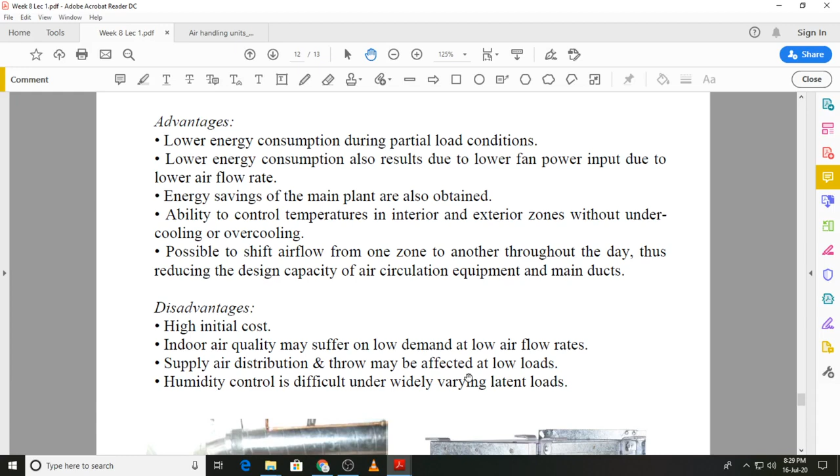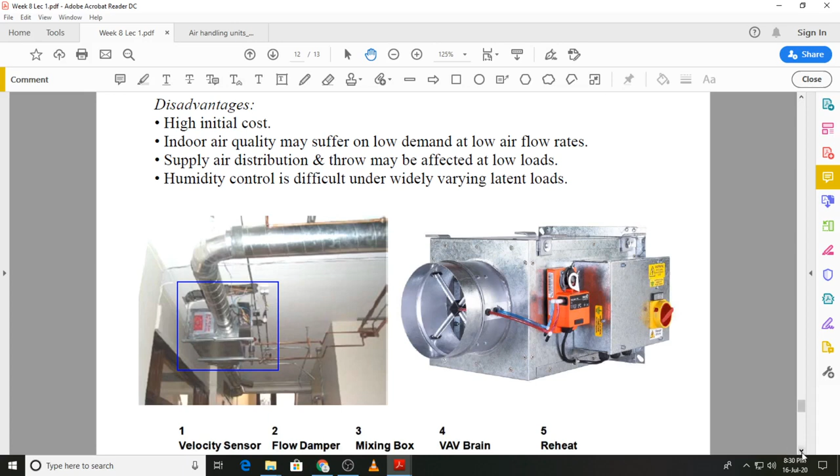I will now show you an actual VAV box and how it is connected to the supply duct. This is the supply duct, and at the end before the zone you can see the VAV box - here's a close-up look of it. This is where it will be connected to the supply duct. There's an airflow sensor here, and there will be a damper inside. This is the actuator to open or close the damper, and this is the control system - we are going to look at a labeled schematic of the same.

So you have the velocity sensor, and a flow damper which can open and close to increase or decrease the volume flow rate going into the conditioned space, and this box is primarily to reduce the noise as the air passes through the damper. We have the control system here along with the actuator, and if required, some of these VAV boxes also have a reheat option. You can provide a reheat option, although it is not necessary - sometimes you can do that, but it does not provide too much reheat, as it has limited capacity. This is how we can vary the volume flow rate into the conditioned zone.

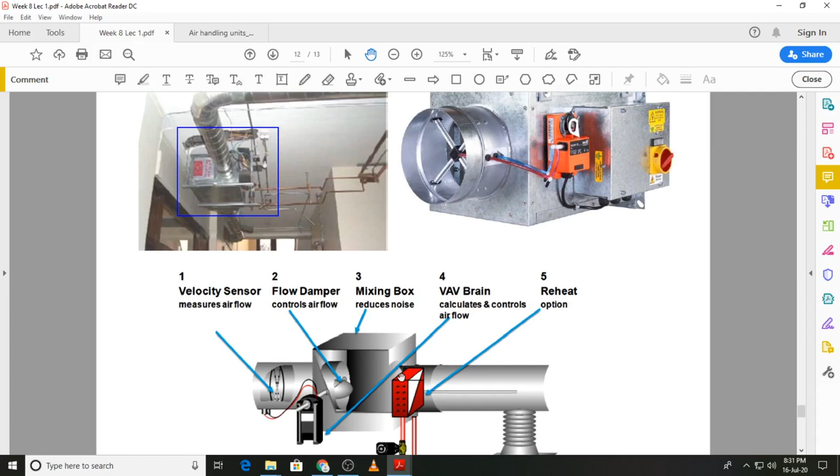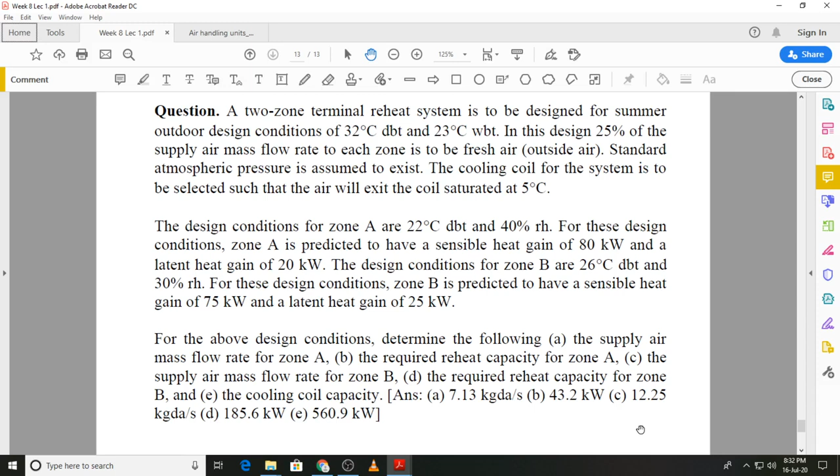I have placed a question at the end, for a terminal reheat system, and it is left as an exercise for you to solve. As I mentioned earlier, the procedure will be similar to that of the cooling cycle we went through earlier - we need to locate the states and develop the entire cooling cycle, and once we have that, we can extract the desired answers as we proceed with the solution. And that is all for this lecture; we will continue with a new topic in the next lecture.